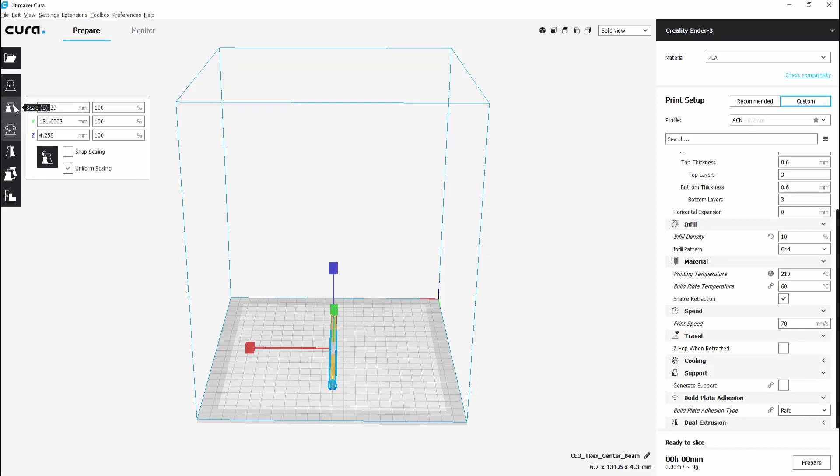So if we have a look at Cura, we can see that it won't fit when scaled. So that's it at 100%. Scaling it up to 200% gives us a problem horizontally where it doesn't fit on the bed. So we could try rotating it, but again, it's going to be just too high, as you can see. So the idea is to bring it into Meshmixer and do a plane cut on it.

Now I could just do a plane cut where I cut it across the middle, print in two parts, but I want to add some pegs and some holes. So I want to add a peg in the middle so that when I glue it together, it's going to have that extra sort of durability. So it's going to just stick together a bit better and be a little bit stronger.

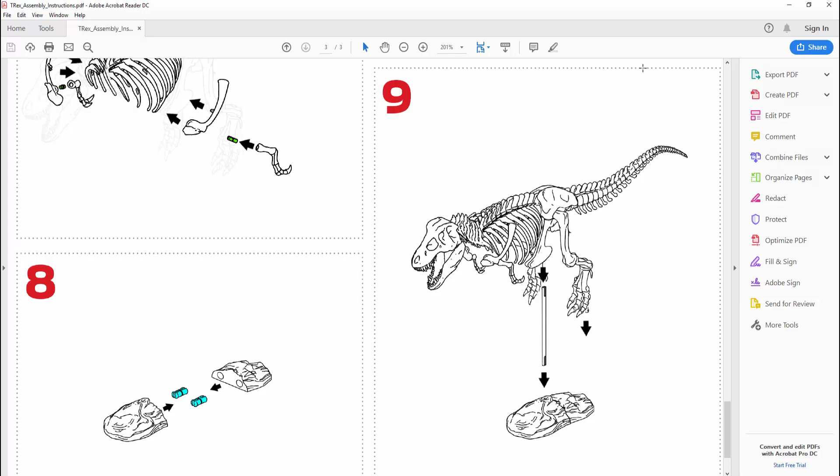Because at the end of the day, if we look back, we can see that it has got to support the entire T-Rex skeleton. And I just think gluing two flat sections together, one, it's not going to glue very well, and two, it's probably just not going to support the model.

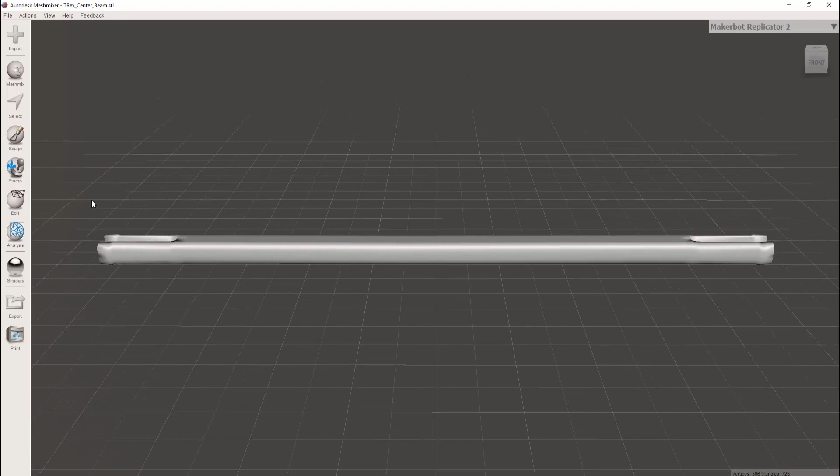Okay, so we're in Meshmixer and we're going to bring our STL in. We can either click import and select the file, or we can just drag and drop it in. That's loaded the beam, and the first thing we want to do is cut the beam in half. So I'm going to use a plane cut. So I'm going to go to edit, plane cut, and then draw a line down the center.

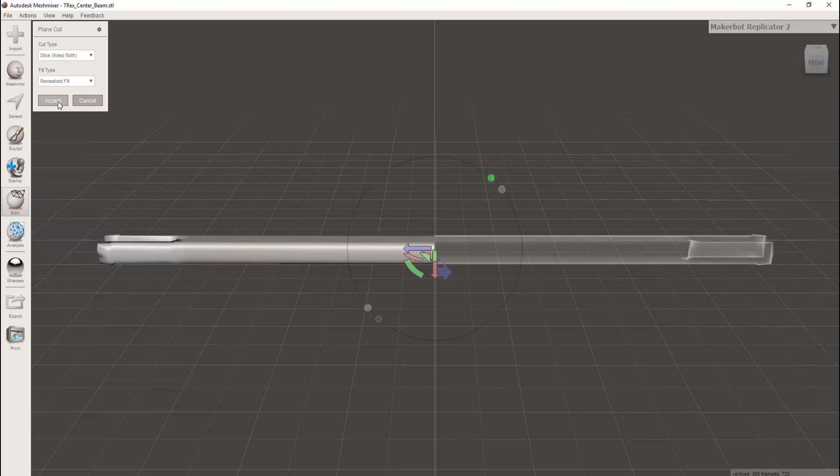So just click and draw, and make sure the red line is straight, and then just release, and that creates the cut. We want to keep both parts. So on the plane cut options, we want to select the cut type and change it to slice keep both, and click accept. And then we want to see both objects, so we're going to go to separate shells, and that brings up the object browser.

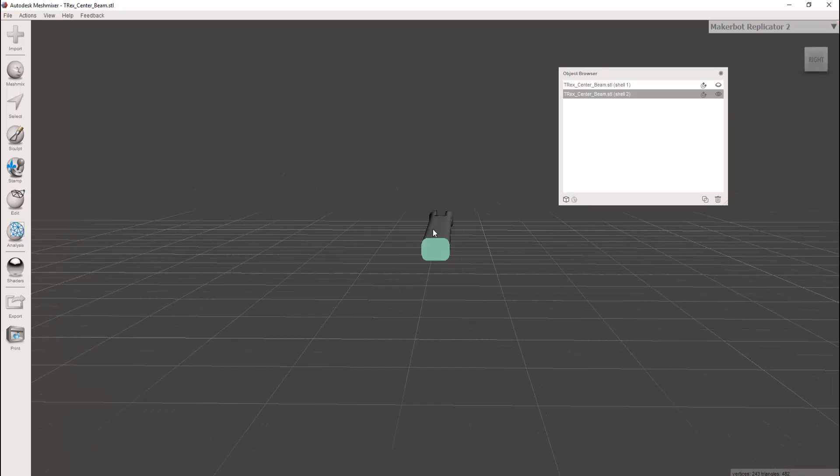So we have two beams. We have the right beam and the left beam. We're going to start with the left beam, and we're going to hide the right beam by clicking the eye icon. And then we can rotate and zoom into the end of the beam. So to do that, I'm just literally right clicking anywhere, and you can pivot and move the model about. Use the scroll wheel to zoom if you've got a scroll wheel on your mouse.

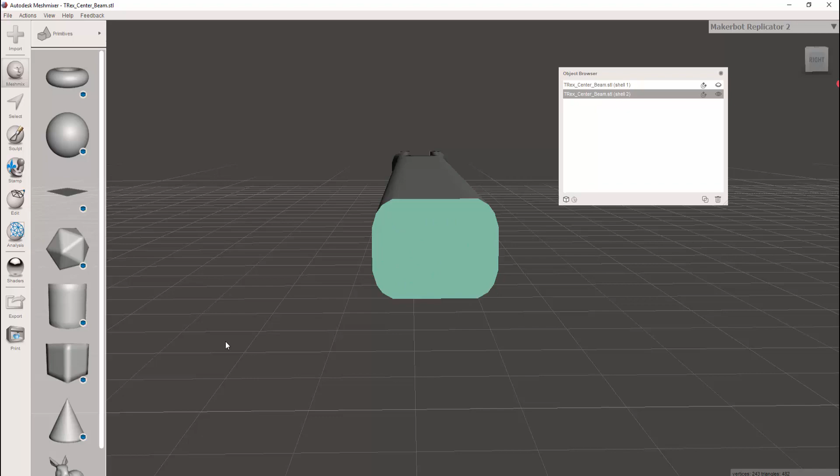So we're going to come across, and I'm going to click Meshmix, and I'm going to pick the cylinder object and drag it onto this plane here, and that's going to create the peg. Now that's obviously too big, but it has attached. So you can see this shape here, it's like a little pointy triangle. I'm going to click in there and just drag it down, and that will reduce the size.

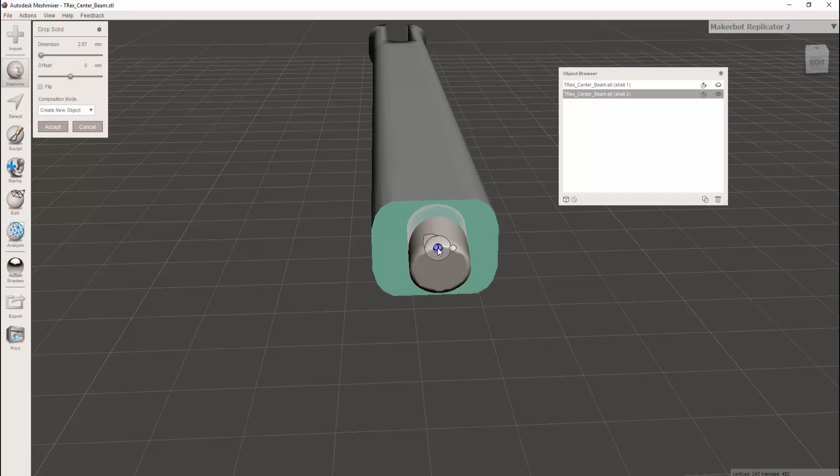And then the white sphere in the middle, you can use that just to straighten it up slightly. Don't worry about it being perfectly straight. It doesn't need to be perfectly straight at this moment in time. You can see that's quite diagonal. So we can just straighten that up. That's fine. And again, don't worry that it's like through the model here. We're going to fix that.

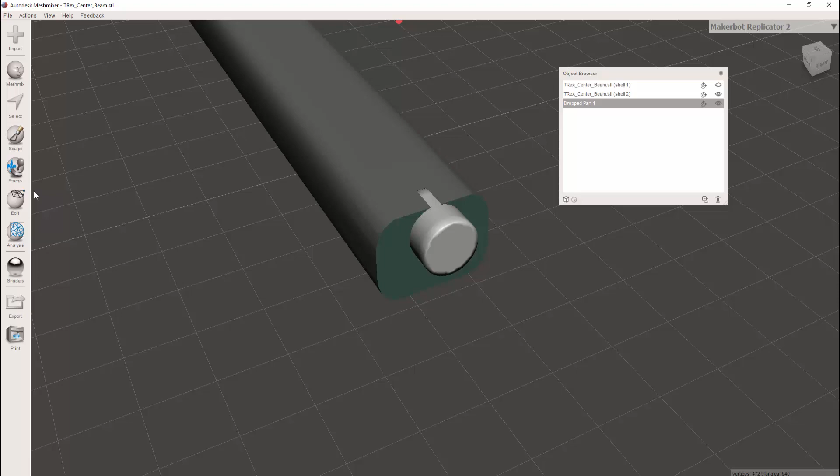So we're going to click accept, make sure it's on create new object, and you can see in the object browser that we've now got the two beams plus the peg. We're going to select the peg, go to edit and transform, and this will allow us to move this object. So we're going to move it down into the middle and just get it more centralized, which is fine.

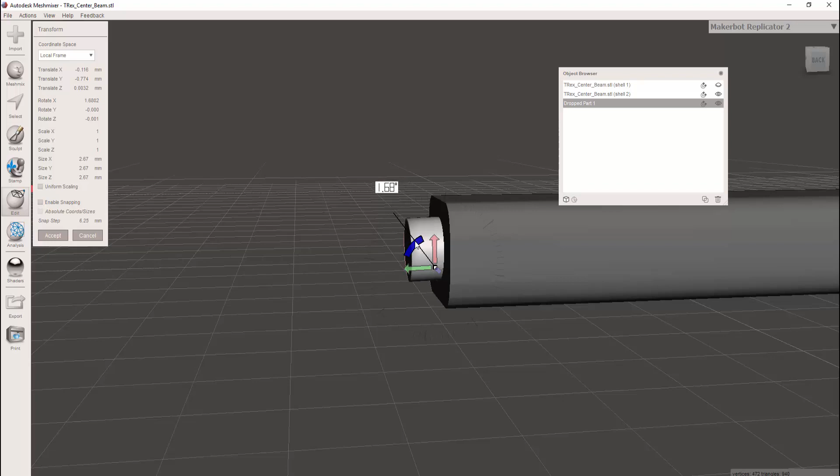And if you turn it to the side, you can see this allows us to move it up, down, at a diagonal. Perfect.

Okay, so now we've got that. We want to duplicate this a couple of times. So click accept on your options, and then come across, make sure your peg's selected, and just duplicate twice. So we now have 3 pegs. We're going to select the original peg, hide the other 2. So we've again still got the left beam and the peg.

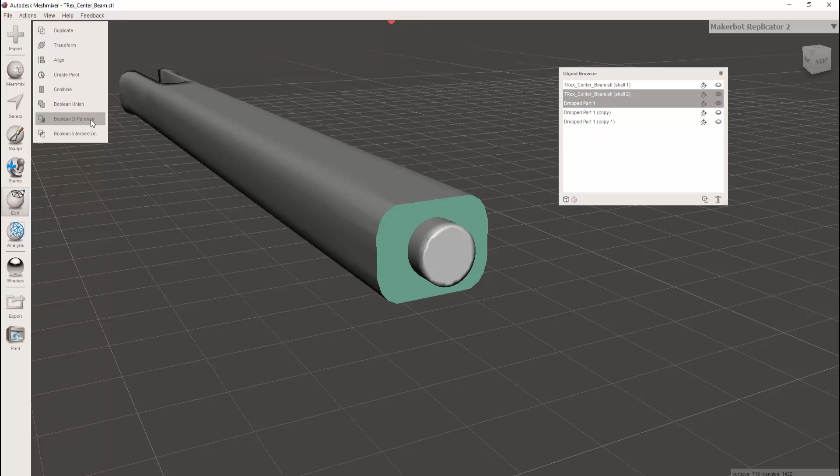We're going to click on the beam and then shift click onto the peg, and that brings up some new options, and we want Boolean difference. So we're going to click Boolean difference, and you can see that sunk our peg into the model. Untick auto reduce result, tick use intersection curves, and then you want to drop the target edge scale down to about 0.3, 0.4, just to reinforce the mesh.

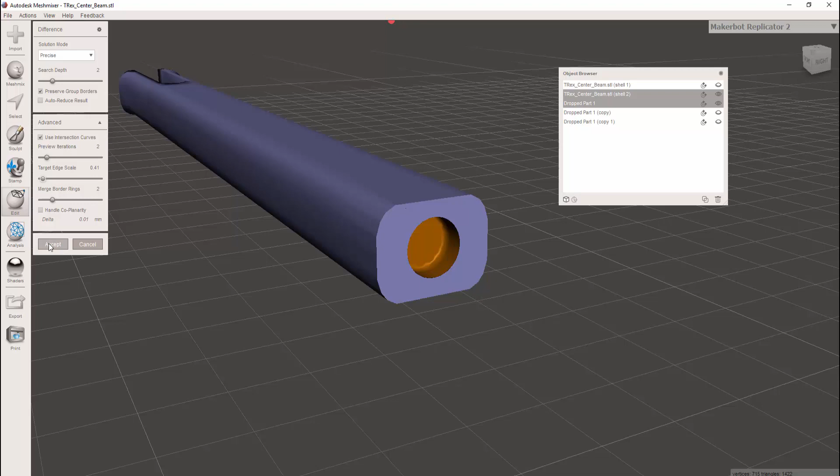So we'll do that now. Sometimes it can bug out at this stage, but that seemed to do that quite well. Okay, so now what we can do is we can accept those changes. And then you'll see that we've actually lost that peg. The peg that's been sunk in, we've lost off our object browser, which is fine. So we're going to select the other beam.

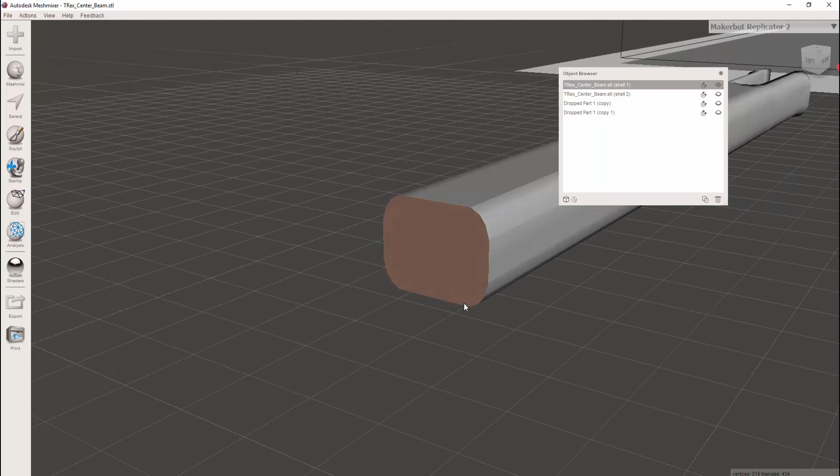So we hide the left beam and we show the right beam, and you can see that this obviously hasn't been done. But if we hide one of the other pegs, there we go, we can see that it's in the right place and ready to go. So we click on here, click on the beam, hold shift, click on the peg, go to Boolean difference, and that will cut it out.

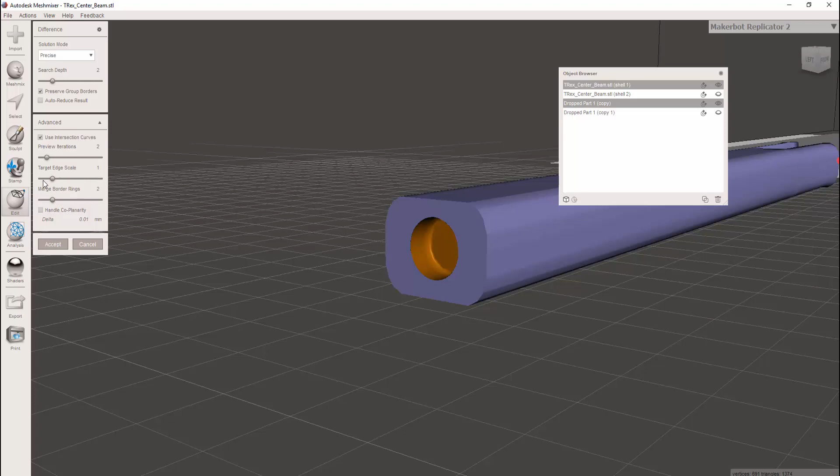And then we can just untick again the auto reduce result. We can tick use intersection curves, and then we can drop the target edge scale down, and that's fine, and we'll accept. Okay, so now you can see we've got three objects. We've got the left beam, the right beam, and the middle peg. So if I hide that, click on the middle peg, you can see there's the middle peg. There's the left beam, and there's the right beam.

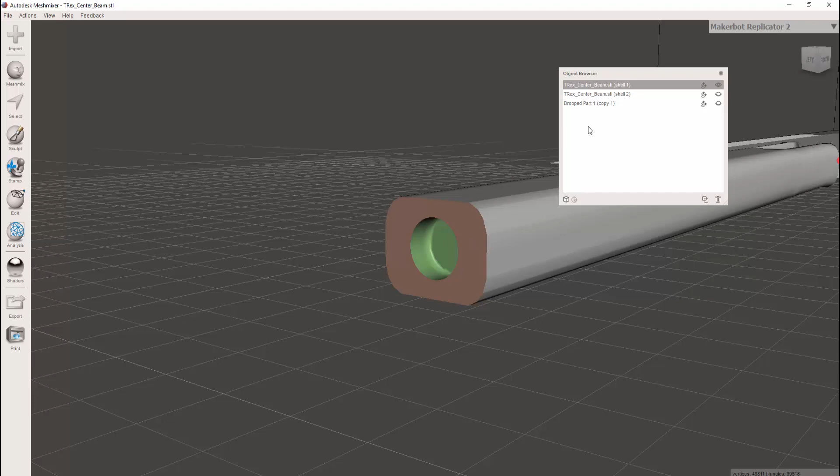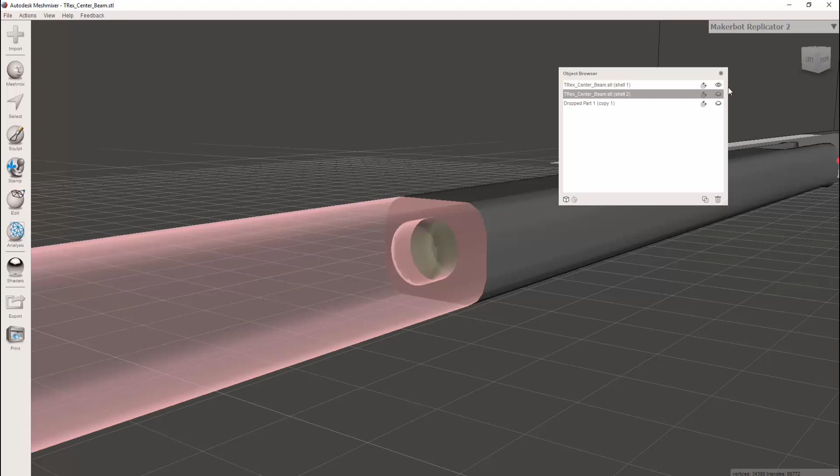So now all we do is we export each of these as STL files. So we'll start with the right beam, and we just go File, Export, and we'll call it T-Rex right beam, and save. We'll click on the left beam and show that, and then go File, Export again, give it a file name, T-Rex left beam, and we'll save that.

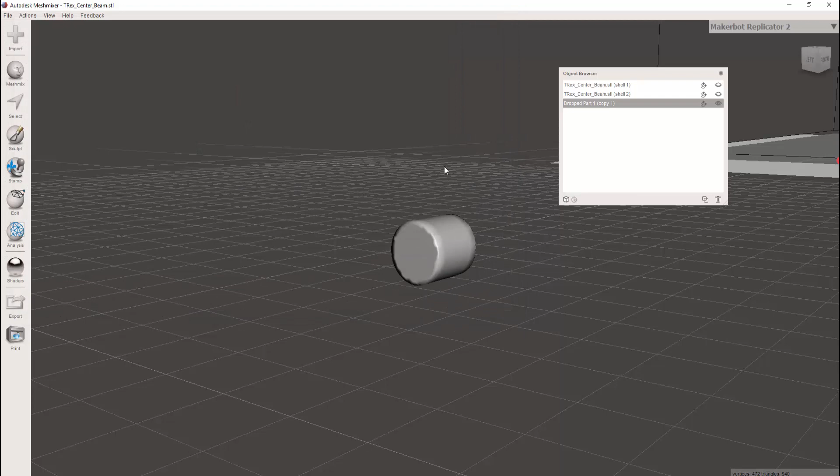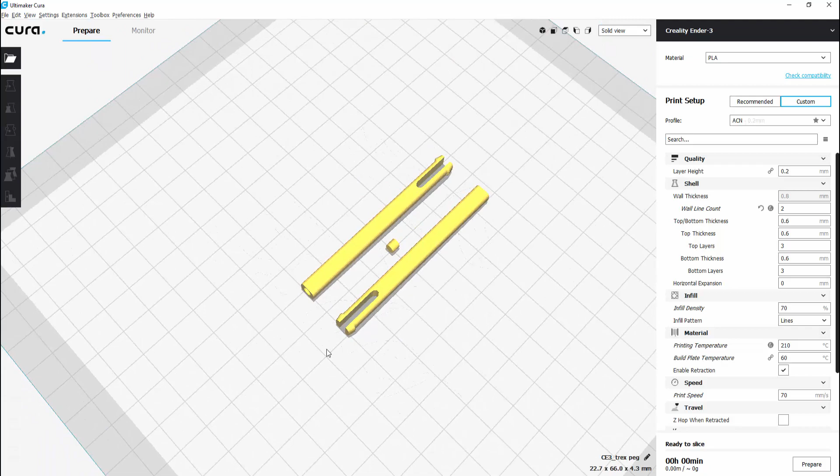And then we'll hide that, and we'll show the peg, and we'll go File, Export again, and give that the final name of T-Rex peg, and save that. So we're now ready to bring this into Cura and get it ready for printing. Okay, so we're going to drag the STLs into Cura. Okay, and we can see there they are. So let's take a closer look. It seems to have sliced reasonably well and quite uniformly.

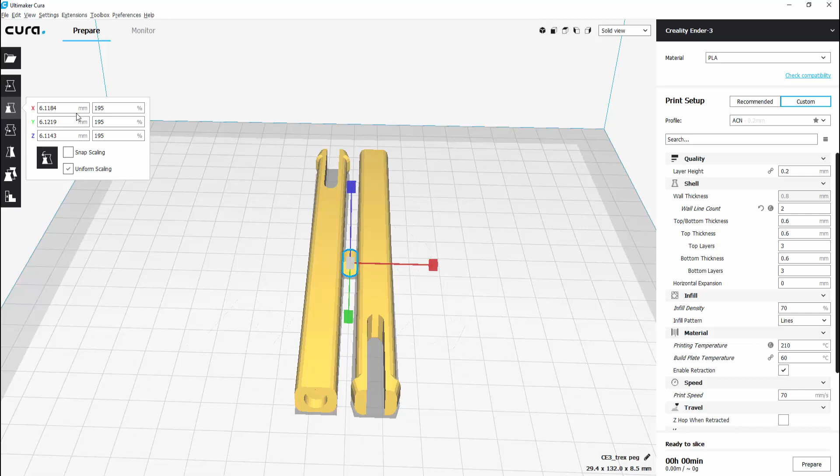So let's scale them. So I'm going to scale the two beams to 200%, and the little peg I'm going to scale to 195. The reason I'm going to scale it to 195 is because I want to make sure that it fits. So that's fine. Just move that out of the way. I'm going to print it flat in this position. Just going to rotate that slightly so the flat surface is touching the build plate, and we'll just move that out the way a bit.

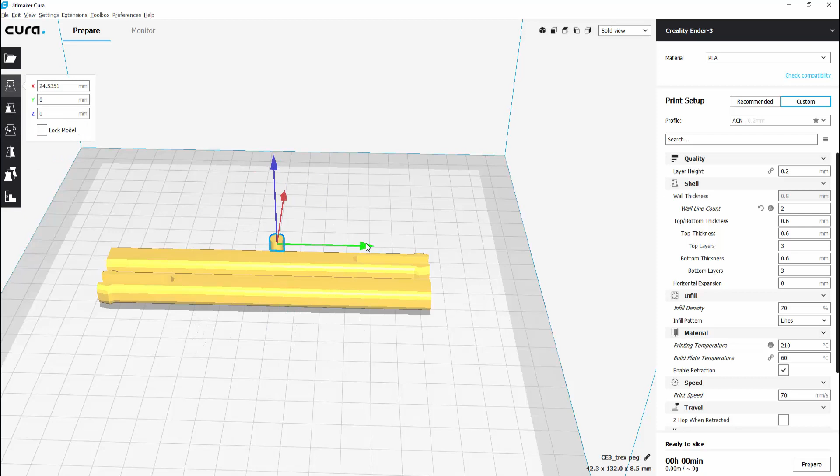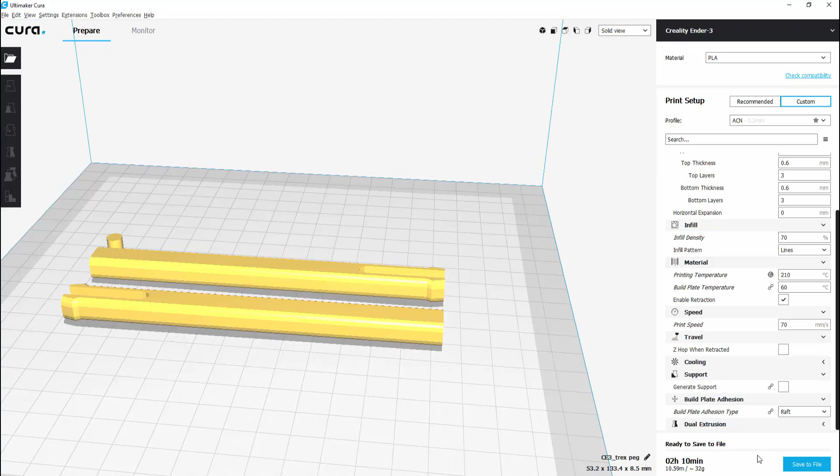Okay, let's take a look at that. That seems fine. The infill density I'm going to do at 70% because I want it quite strong, and I'm going to use a raft to print on. So let's see how long that's going to take. So about 2 hours, 10 minutes. So probably about 2 hours 45, 3 hours. So let's save that and print it.

Okay, so it came out really well. Really happy with this. Pegs printed quite nicely. Quite a nice all-round finish. Obviously I printed the peg slightly smaller, so shouldn't have an issue fitting it in. And it just slots together. There we go. That's pretty cool.

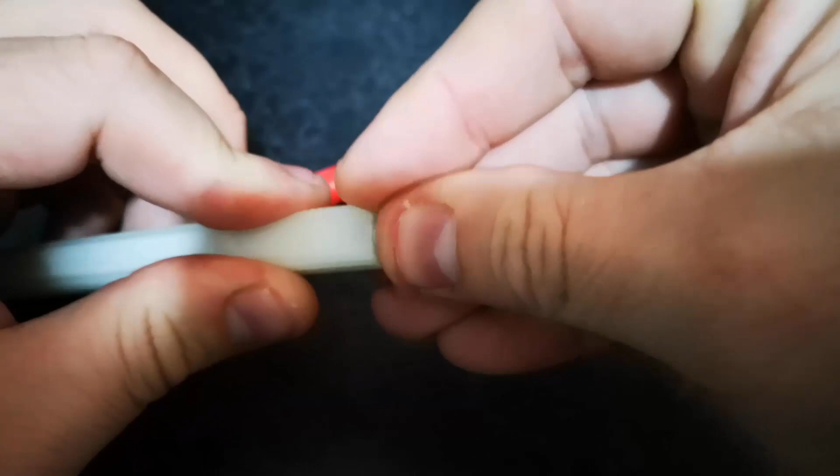Okay, so we're going to glue it together. I've got some just standard super glue, and we're going to see if we can get this to stick. Okay, so what I'm going to do is put some glue around the ends of both beams, apply the peg, and I'll tap it in slightly just to make sure it stays. And again, obviously the other side.

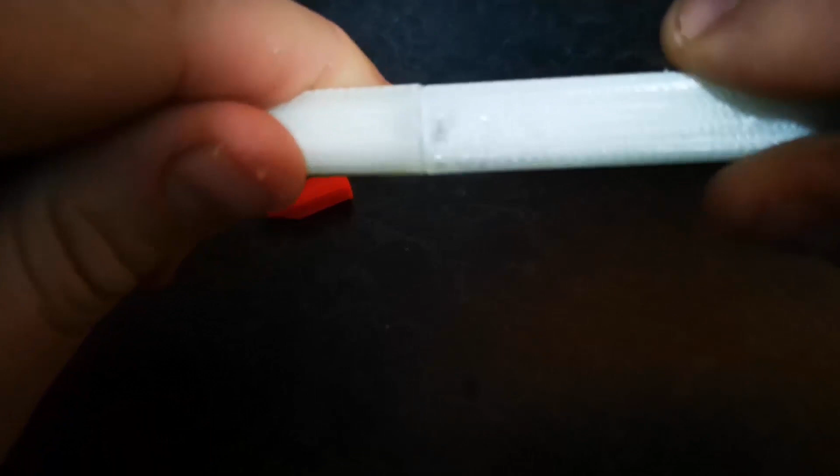And that's that really. So I'm going to pop a little bit of glue just in the seam. Just let it soak through all the way around, and then I'll put it up somewhere to set.